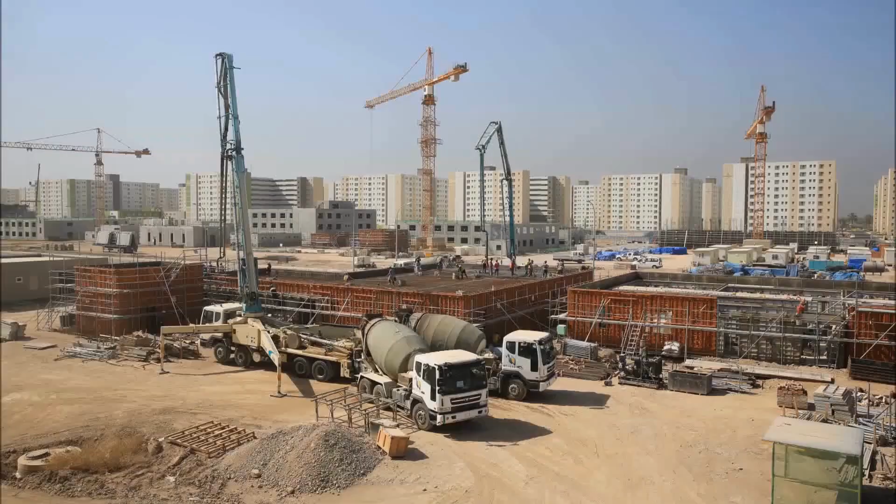Clean water, waste management, and housing. Our goal is to create a sustainable, resilient, and affordable infrastructure for 2,000 families using local resources and practical technologies that can be built today. This is our vision for what a future-ready community could look like.

First, the needs of a community anywhere in the world start off with the housing. These houses must contain the facilities that will allow their residents to enjoy a high standard of living, with access to drinking water, heating, cooling, and electricity.

Looking at the whole community now, for the well-being of its citizens, a community must have safe public spaces where people can confidently go out for a walk and enjoy it. People must be able to access their place of work, schools, shops, and their leisure activities easily either within the community itself or in neighboring settlements, emphasizing the importance of robust transport networks.

Lastly, a community should always strive for its sustainability, aiming to reduce emissions and increase its air quality whilst protecting the natural environment around it.

Taking all this into account, Cyprus has been selected for the development of this new community due to its strengths and areas for improvement. This island enjoys the strong Mediterranean sun for most days of the year, opening the opportunity to harvest its energy with solar panels.

Moreover, the current Cypriot settlements have car-centered designs, which explains the over-reliance on personal vehicles, the unsafe roads for cyclists, and the high carbon footprint of Cypriots.

For reference, the commuting habits of Cypriots, in addition to the energy performance of typical Cypriot households, lead to a per capita carbon footprint of 2.6 tons of CO2 equivalent per year.

Regarding housing costs, a cost of living crisis is being felt within 4-member family houses, going for €500,000 in the city of Limassol, with typical mortgage payments being at about €2,100 per month and rents at €2,500 per month. For reference, each person in Cyprus pays €8.5 per month for their electricity consumption. All these can definitely be improved.

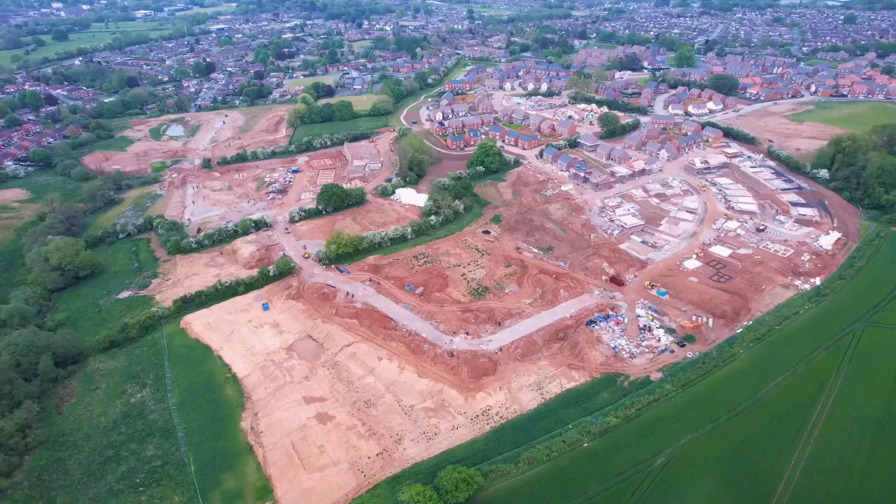Still, all quarries in the end of their operational life need to be reused somehow, with some being turned into green spaces, others into lakes, and more into solar farms. Imagine how good it would be if we could turn this scar in the land into a thriving community. Hence, we present this community design as a possible future for the rehabilitation of this site.

The community consists of 2,000 house units, all equipped with photovoltaic panels for electricity generation, as well as a heat pump shared between a set of 6 houses to meet the heating and cooling requirements.

All houses in the community are laid out facing towards the south, maximizing solar energy absorption. Houses are arranged in neighborhoods as seen on our community schematic, which include minor roads, LED street lamps, and trees. Cycling infrastructure is built in our community to minimize traffic and reduce energy requirements and emissions.

A park and ride is built in the community outskirts near a bus stop, which connects our residents to Limassol, Cyprus's most developed city. The tree cover in our community is around 20%, and the trees chosen to be planted are local and common to Cyprus and the Mediterranean, such as palm trees, lemon trees, cypresses, and olive trees.

Trees are a vital part of our community design, as they have been found to cool down the surrounding air via evapotranspiration and by providing shade, while also contributing to localized cooling by absorbing and reflecting sunlight.

The community also consists of parks and lakes, creating a beautiful environment for its residents. These green areas not only promote physical activity and mental health, but also develop stronger social connections among residents, ultimately contributing to a more vibrant and cohesive community life.

The community is designed for 8,000 people, comprising 2,000 families with 2 adults and 2 children each. Children are evenly split between the ages of 0 to 9 and 10 to 18, with 2,000 children in each group. 4 primary schools are built in our community and 2 secondary schools.

Furthermore, the community consists of 1 hospital, 4 pharmacies, as well as a main square with shops, maintaining the community needs in terms of health, food, and entertainment.

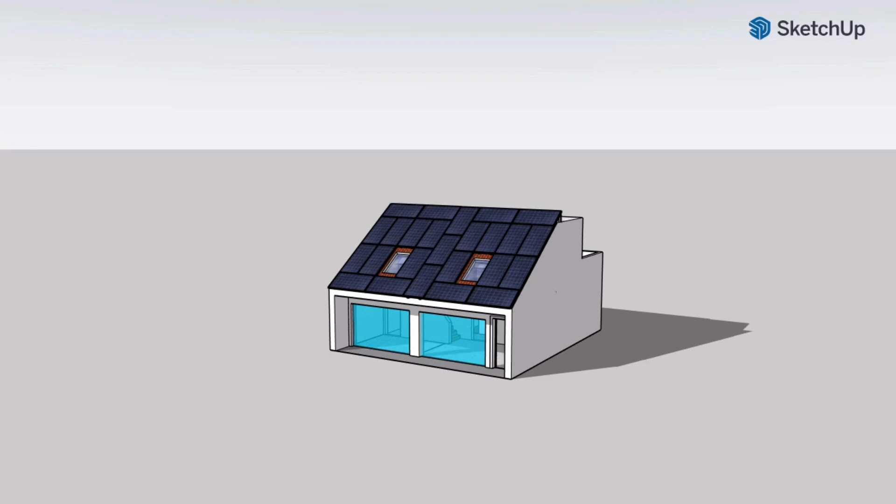Each house is designed according to the Passive House standard, a proven, highly efficient design framework where the house's energy losses to the environment are controlled and minimized. Since the Cypriot sun's heat is a double-edged sword, the house architecture was made to get the most out of it while avoiding its drawbacks.

The large south-facing roof is at the optimal angle for solar panels, with which it can be filled. For example, here we have 25. At the southern face of the house, on the ground floor, 2 massive windows have an accurately sized overhang which excludes the sun from the house during the hottest months of the year, while letting it shine through and heat the house during the colder months.

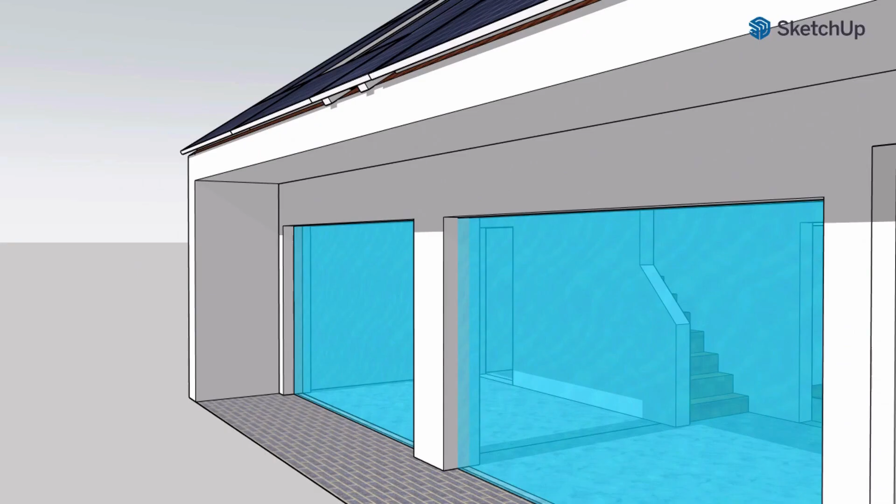2 southern roof windows fill the house with daylight, naturally lighting it up and reducing the need for artificial lighting during the daytime hours. Of course, window blinds can be used on any of these windows at the family's discretion to fine-tune the heating, lighting, and privacy they offer.

Last, the balcony is cleverly shaded from most of the sun, giving the family a nice place to pass their time. Despite appearing to be a building solely designed for energy efficiency with its bulky shape and specializations, it features all the facilities needed to be loved by a family of 4.

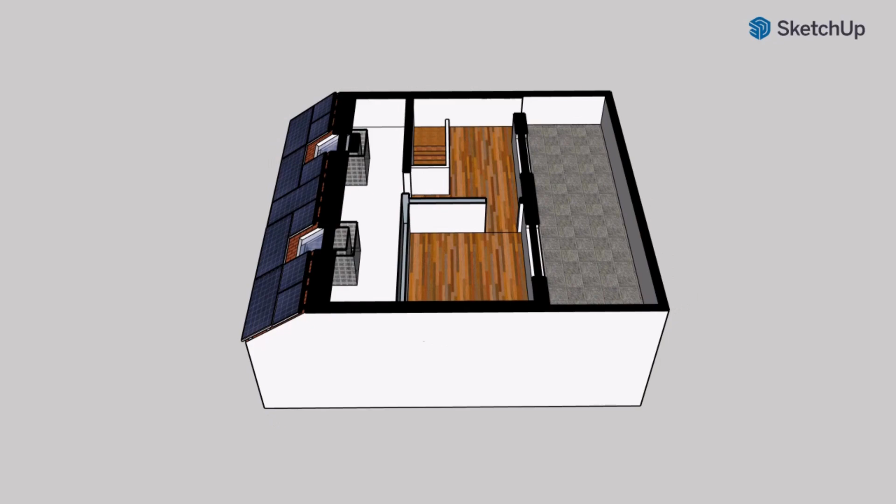On the first floor, other than a balcony, a bedroom and a general purpose room can be found. A huge storage and utility area is also found under the southern roof. Descending the staircase, the living and dining room is seen, enjoying the view of the tranquil streets outside.

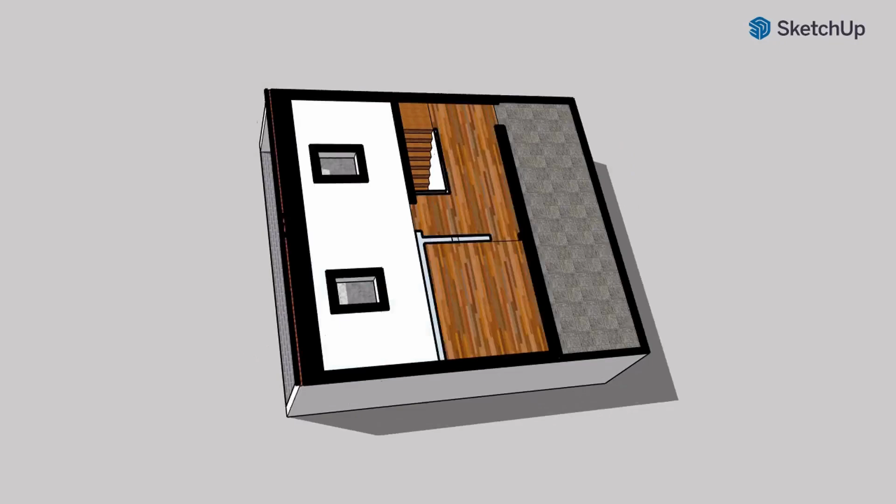The 2 remaining bedrooms of the house can be found on the ground floor, with a kitchen and a hallway connecting them to the bathroom, which can also be accessed from the living and dining room. Given the opportunity, another small storage space was created under the staircase. Addressing all of the needs of a typical family, this house makes their life more sustainable without impacting their way of life.

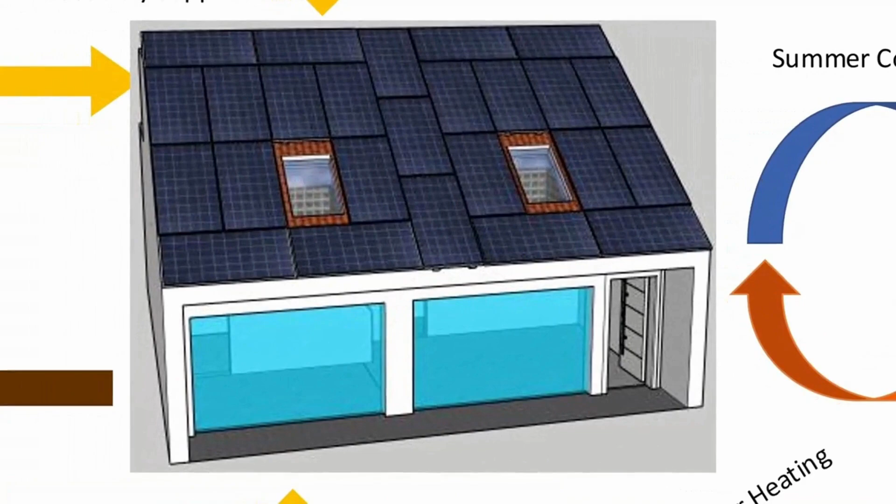Our energy solutions for our homes can be seen in the following diagram. The cooling and heating duty is provided through heat pumps, which serve a cluster of homes. The heating duty is supplemented throughout the year from waste heat recovered from the combined heat and power plant. This plant is run using biogas generated from community wastewater. The waste from this biogas plant can be used as fertilizer for local farms.

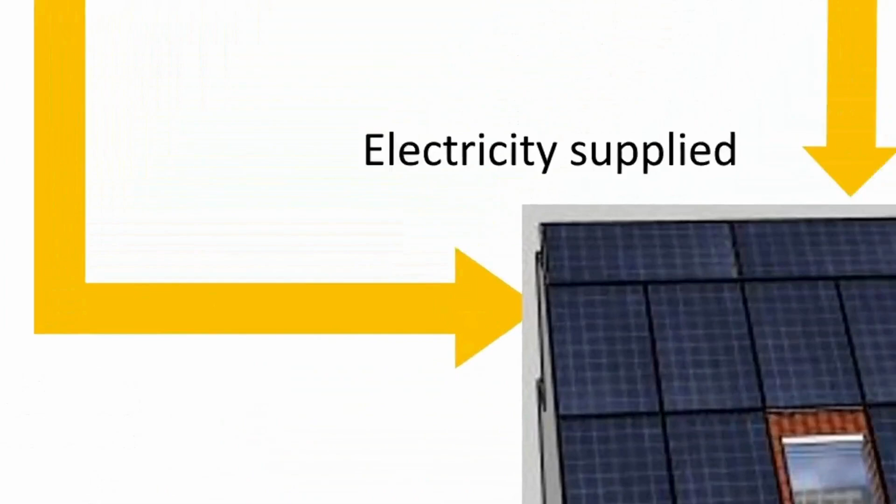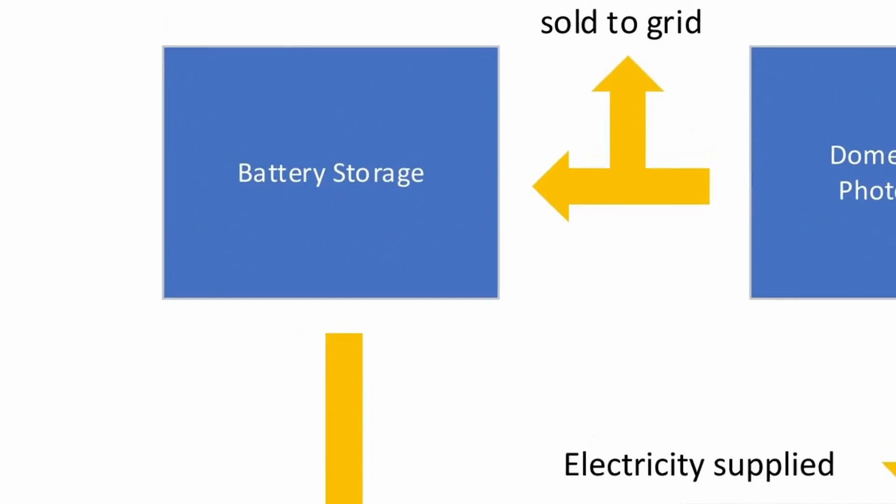Our main production of electricity is through domestic solar photovoltaics, which are positioned on our south-facing roof. We've also incorporated battery storage for the excess electricity generated, to be able to supply power throughout the day, with the remaining excess electricity generated that can't be stored to be sold to the grid.

To power our low-energy homes, we aim to exploit one of Cyprus's biggest strengths, the sun. The solar system for our homes has been designed to handle worst-case scenarios, modelled for situations where our homes require the maximum heating and cooling duty, and compared with that of an average day. This ensures that the residents of our community can live comfortably whilst not to the detriment of the planet.

With the amount of available sun varying not only throughout the year, but throughout the day, it is important to capture the excess energy produced to be used for periods where we don't have it. We still want our electronics to work at night, after all.

From this modelling, it was determined that we require a maximum of 21 kilowatt hours of energy to be stored on our worst day. This is about the size of 2 medium-sized commercially available batteries, and this requires a total of 8 solar panels to power the home and charge the batteries.

With the available area on our south-facing roofs, we can fit more than enough solar panels, 25 to be exact, to power the home throughout the day by incorporating the smart energy storage. The additional solar panels allow for expandability for the future. If the community energy demands increase, we have the headroom. This also allows for an income stream of €174 per month through the sale of excess electricity to the grid.

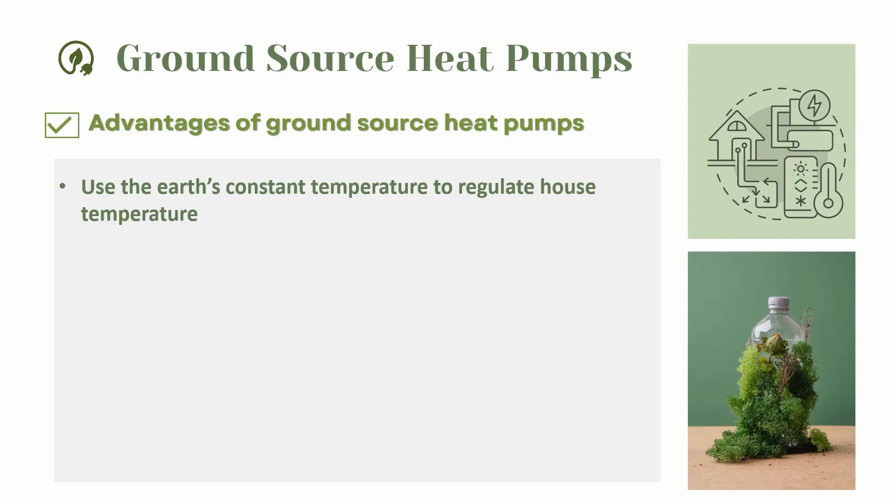To meet the cooling and heating needs of our newly built community, we'll be installing geothermal heat pumps, offering an energy-efficient solution. Unlike traditional systems, geothermal heat pumps use the Earth's constant temperature to regulate house temperature, providing consistent year-round performance. This technology will significantly boost the energy efficiency of our community.

With a high coefficient of performance of around 4, geothermal heat pumps dramatically reduce household energy consumption. In fact, similar systems installed in Enfield, North London have lowered energy bills by up to 50%. Ground source heat pumps also offer practical long-term benefits. They require minimal maintenance and have an impressive lifespan of around 20 to 25 years.

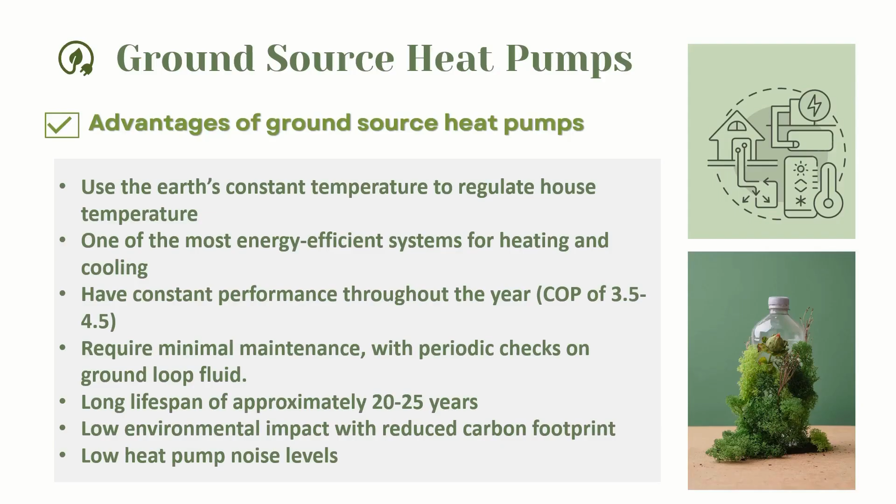Lastly, incorporating geothermal heat pumps into our community plan will substantially reduce our carbon footprint, contributing to a more sustainable future. Ground source heat pumps will be used for both heating and cooling. Our plan involves installing a horizontal closed-loop system, which will circulate a water antifreeze solution through underground pipes, absorbing and releasing thermal energy as needed.

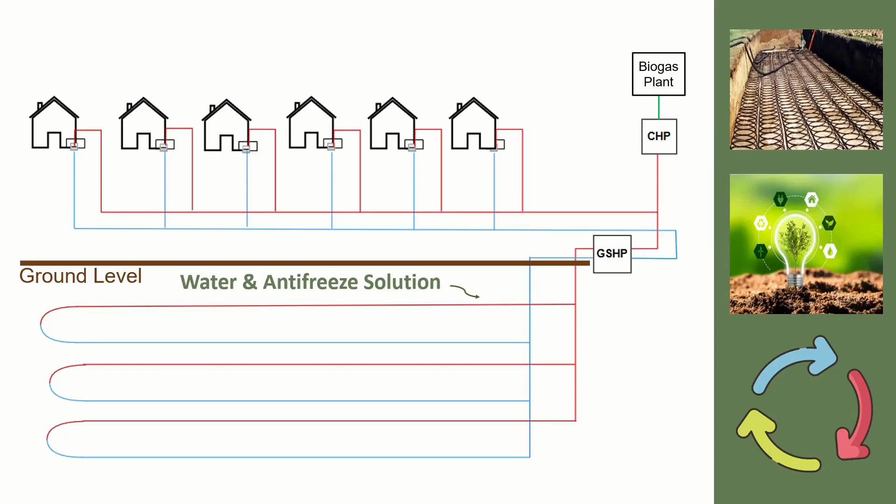The system will efficiently serve blocks of 6 houses sharing a single 52 kilowatt heat pump. This approach will prevent oversizing during non-peak demand periods, while meeting the 8.4 kilowatt maximum heating demand for each house.

While geothermal heat pumps have a higher installation cost than traditional air conditioning systems, they can exploit economies of scale. By increasing the system size, the cost per unit of cooling or heating is lowered and the efficiency is improved, as the relationship between capital costs and system size is non-linear. Integrating the heat pump ground loop system with the municipal infrastructure, such as water mains, can reduce installation costs and enable waste heat capture.

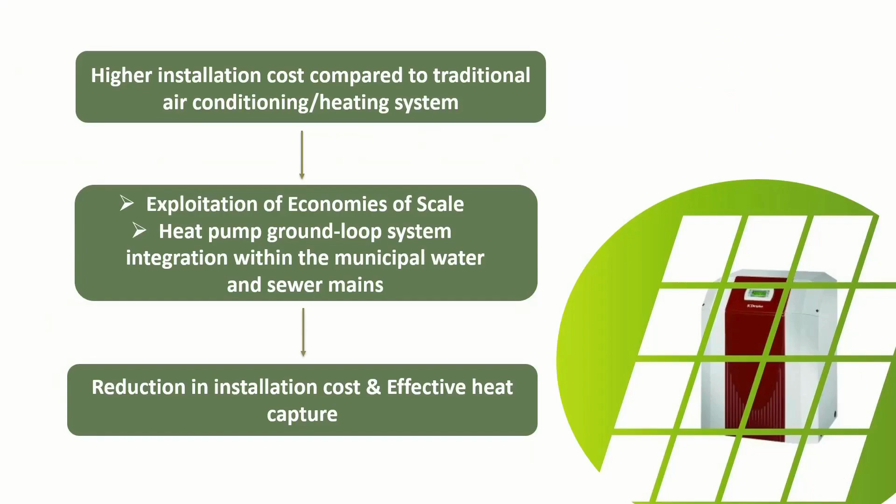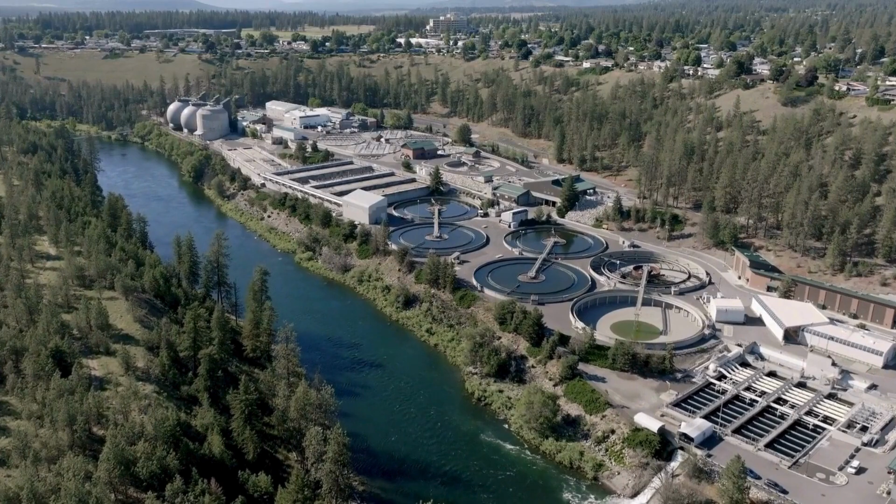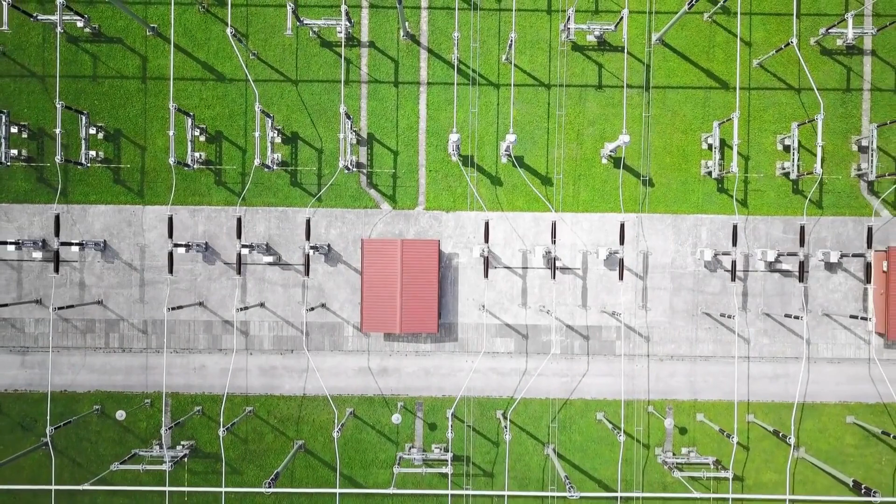This integrated approach ensures a more cost-effective and efficient system overall. In our design, wastewater isn't just a sanitation challenge, it's an energy resource. By converting the organic matter in household wastewater into biogas, we can create a reliable and local source of energy that's already flowing through our homes. This approach tackles both waste management and energy supply in a single system, turning what would otherwise be discarded into something useful. Unlike centralised power systems, our biogas plant operates independently of the grid, improving resilience during power outages and helping to ensure a stable energy supply.

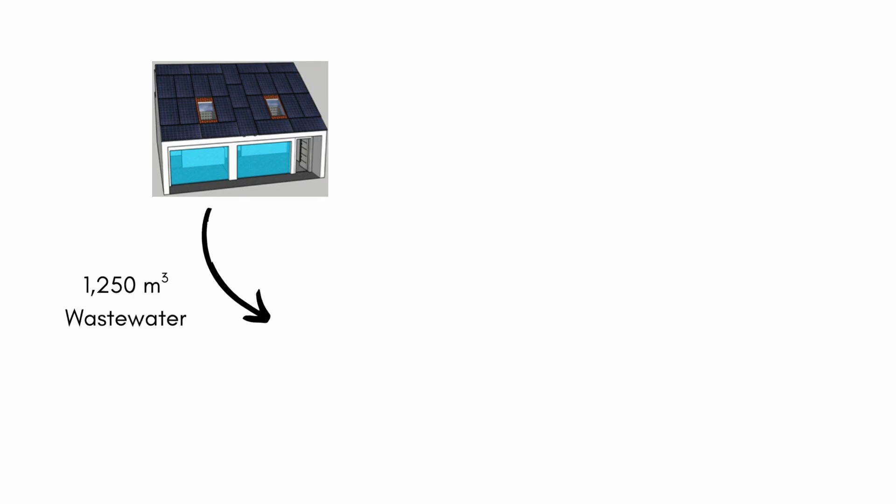Based on Cyprus's national data, our community of 8,000 people is expected to generate about 1,250 cubic metres of wastewater per day. Using anaerobic digestion, this can produce around 125 cubic meters of biogas per day, which contains about 2,500 megajoules of energy. We convert this biogas into usable energy through a combined heat and power plant.

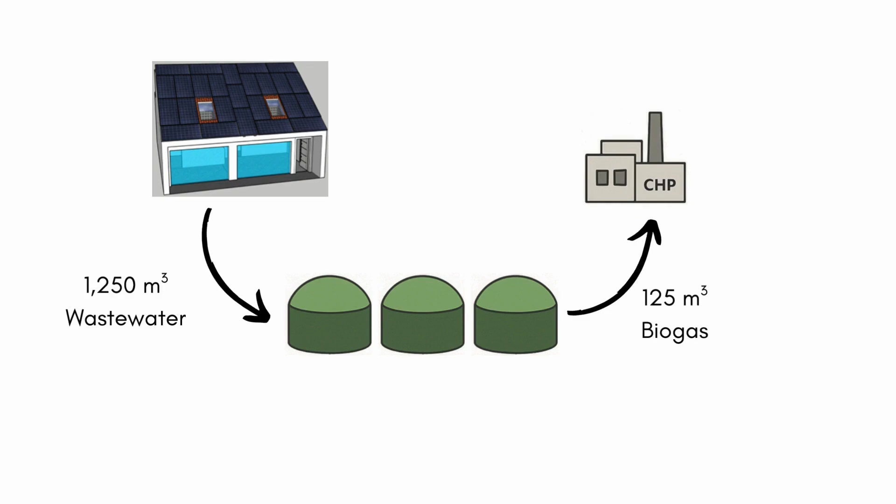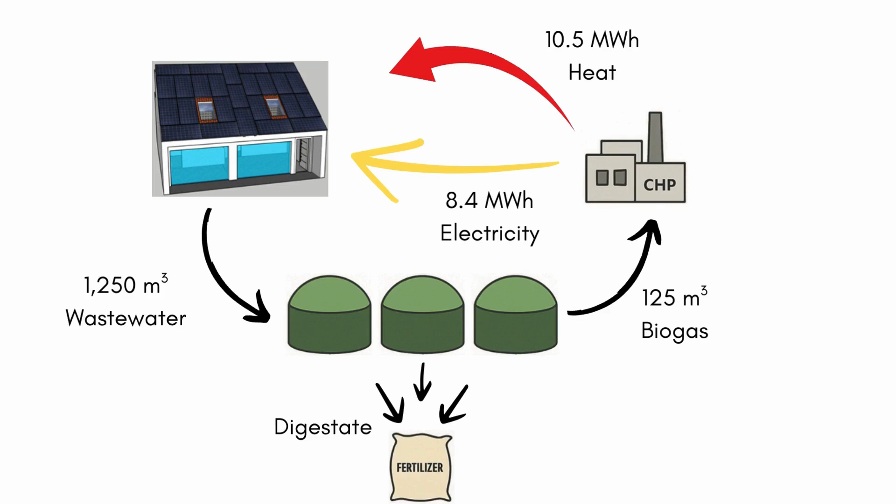This system delivers approximately 8.4 megawatt hours of electricity per month, whilst also capturing and reusing 10.5 megawatt hours of thermal energy that would otherwise be lost in a conventional generator. This recovered heat is used during the colder months to support residential heating. In addition, the system produces a nutrient-rich digestate as a byproduct, which is repurposed as organic fertilizer for local farms.

By transforming waste into both power and heat and returning nutrients to the soil, this system gives communities control over their energy, recovers value from waste, and reduces emissions. It will be valuable now to look into the results produced by this design and see how this community compares to Limassol, the closest settlement we could find to that town.

Although passive houses are generally found to have bigger upfront costs compared to regular houses with their enhanced insulation and energy recovery devices, even the most conservative building estimates predict them to be 86% the price of a regular Cypriot house with the same square footing, a testament to the high living cost of Cyprus. Regarding energy savings, our passive house design was found to consume up to 90% less energy for heating and cooling than conventional houses. It will be insightful to visualize the net household energy trends.

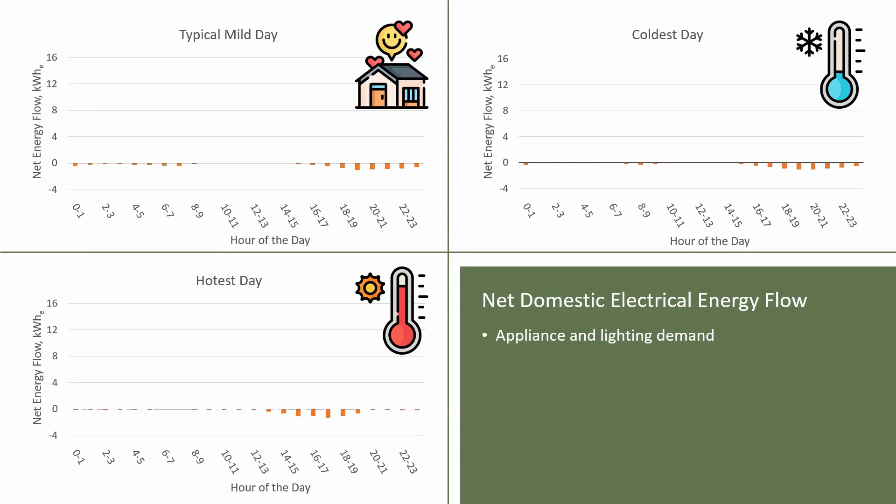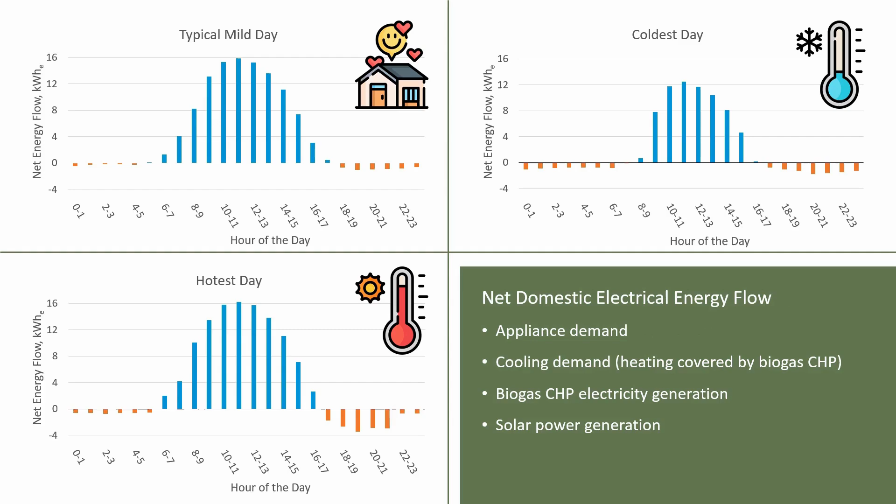Here we have three scenarios: a typical mild day, the hottest and the coldest days of a typical Cypriot year. First, the appliance and lighting demand is seen as a small daily requirement. The cooling demand is then added to the hottest day. All the heating demands during the coldest day are covered by the biogas combined heat and power heat supply. The biogas combined heat and power and solar electrical supply then bring the system to net production, and finally the batteries cover the times in which the sun is not shining.

For example, in a mild April day, the total per household demand is about 8.6 kilowatt hours, and after the addition of these systems, each house is a net producer of 88 kilowatt hours of electricity, while its needs are completely covered during the nights from the batteries.

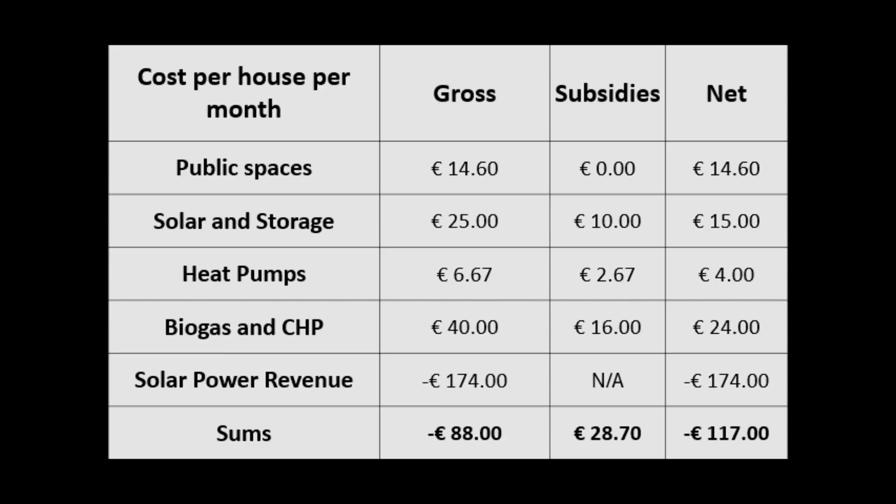This is easily affordable by the combined salaries of a typical Cypriot high school teacher and nurse of €4,200 per month. Similarly, for the operating and maintenance costs of the community, the solar production is enough to cover them and even bring a profit between €1,400 and €1,000 per house per year, depending on the granted subsidies, versus a typical municipal local tax of €300 to €90 per year.

Last, because of our energy strategy and the bus access which will be granted to the community citizens, the annual carbon footprint is estimated to be at 0.9 tons of carbon dioxide equivalents per individual, a big change from the typical 2.6 tons of carbon dioxide equivalents for these countries' individuals.

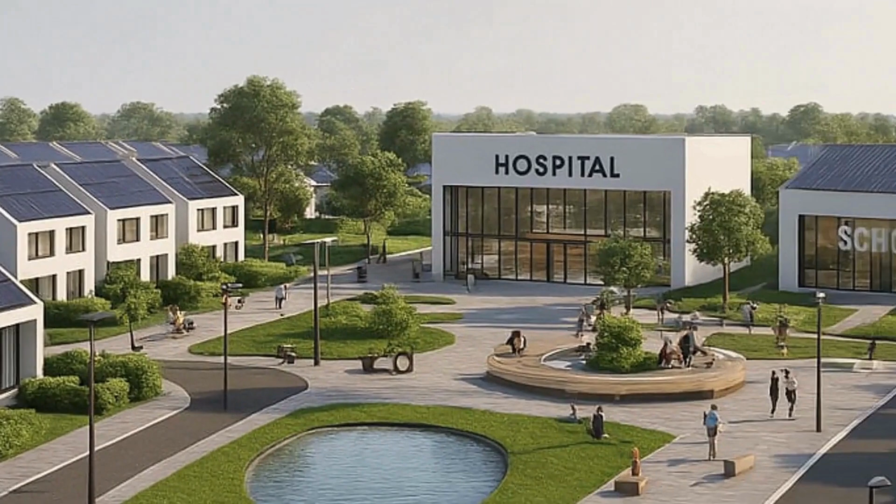In conclusion, our community design is located at Kythreotis Quarry in Cyprus, just 30 kilometers away from Limassol, providing a prime site for sustainable development. This location is ideal for repurposing industrial land into a low-carbon community. The critical needs of this community, affordable housing, education, healthcare, and green spaces, have been met by integrating 2,000 energy-efficient homes with essential infrastructure, including 4 primary schools, 2 secondary schools, a hospital, and parks. This design aligns with Cyprus's demographic needs and environmental goals, ensuring a sustainable and well-rounded community life.

Each housing unit is designed to maximize energy efficiency with solar panels, heat pumps, and battery storage. The community layout prioritizes renewable energy sources, cycling infrastructure, and green spaces, all interconnected to reduce carbon footprints and enhance the quality of life. Our community is benchmarked against Limassol, the second largest city in Cyprus, showing a 65% reduction in carbon emissions, a 30% decrease in home purchase costs, and savings on monthly utilities.

Engineering calculations confirm the performance of these systems, with energy savings supporting both environmental and economic sustainability. By focusing on renewable energy, smart design, and affordable living, our community offers a sustainable and livable future for the residents of Cyprus.